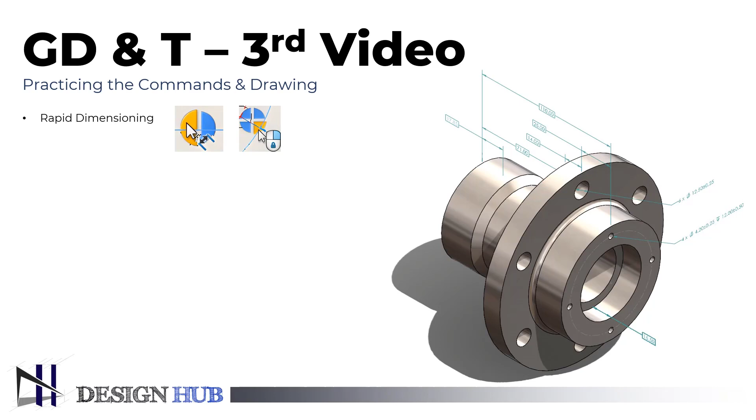In this video, we will practice the commands and drawing with tips and tricks. We will learn about rapid dimensioning, how useful is the dimension palette, and the format painter.

First, let's create a new part and select the required plane for sketching. Here, I will select the front plane. Now, make a center line to activate the revolve command.

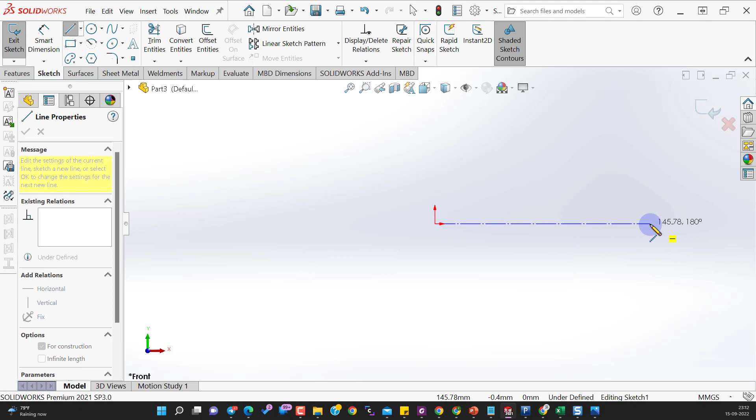Now, follow the directions, and start sketching the required shape of the part above the center line.

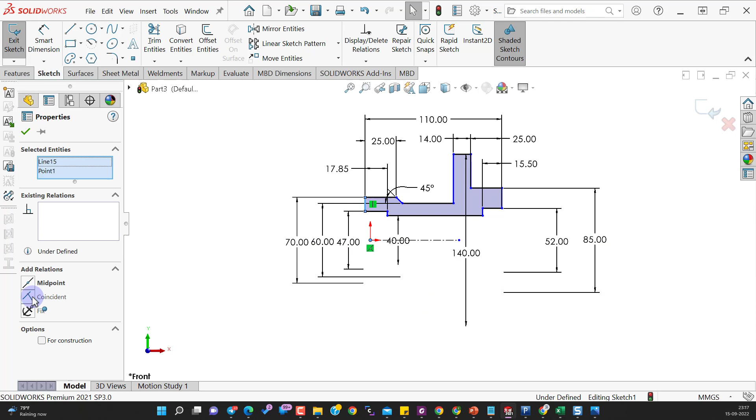After making the sketch constrained, use revolve command and select the center line as an axis of revolution.

Now, we will specify the material of the part. The material used here is AISI 316 stainless steel. This stainless steel can bear harsh environmental conditions requiring greater resistance to corrosion, higher operating temperatures with increased tensile strength,

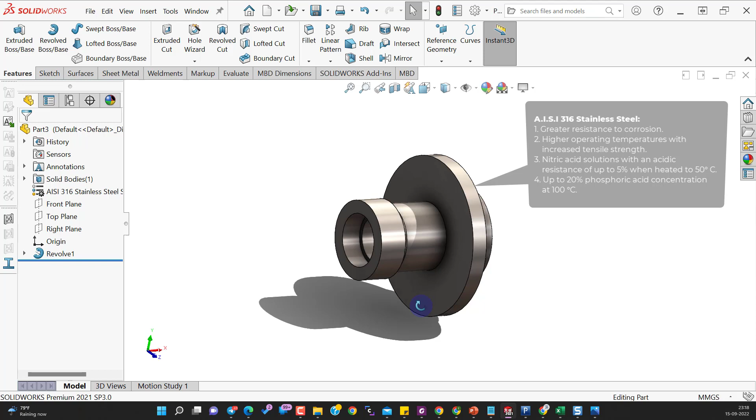nitric acid solutions with an acidic resistance of up to 5% when heated to 50 degrees Celsius, up to 20% phosphoric acid concentration at 100 degrees Celsius. This material has a relatively high strength to weight ratio, is easy to clean, and has an aesthetic appearance.

Now, we will introduce the fillet to the part with a radius of 3 mm.

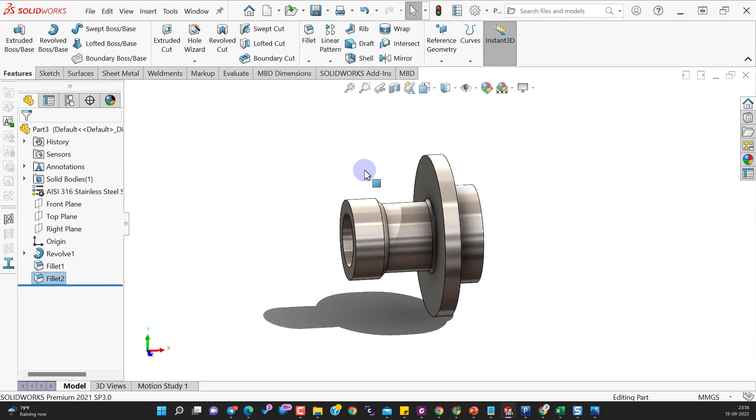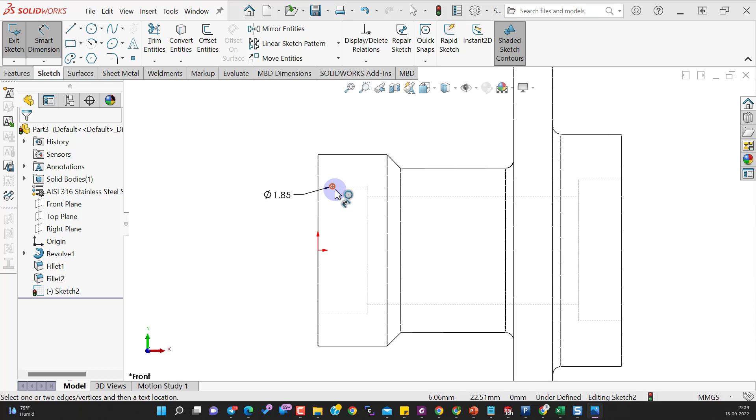We will make a half round groove along the inner side of the part. Create a circle with a diameter of 1.85 mm, and place it 2 mm from the part's left side.

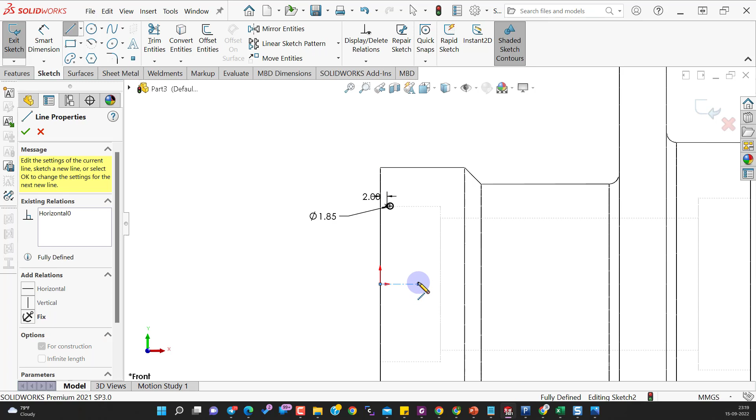Make a center line and use revolve command. You can check the half-round groove by using the section view.

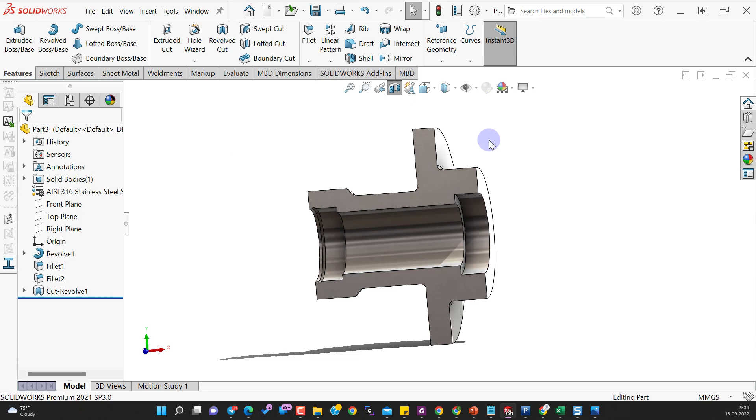Now, in order to make 4 M5 holes on the right hand of the part, place a point on this surface.

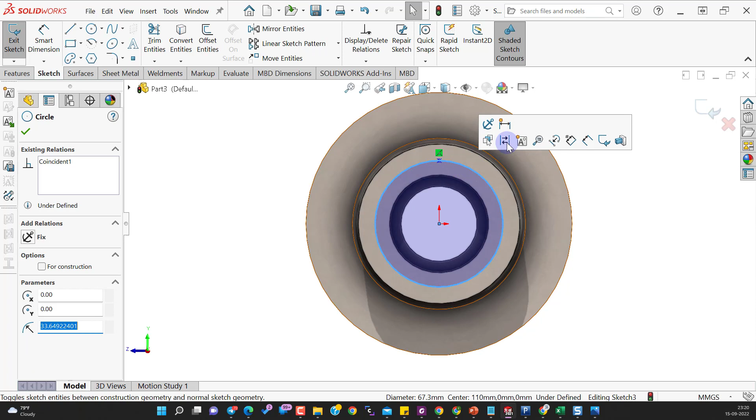Make the circle a construction geometry, and define its diameter as 70.50 mm.

Align the point and center of the part vertically to make the sketch constrained.

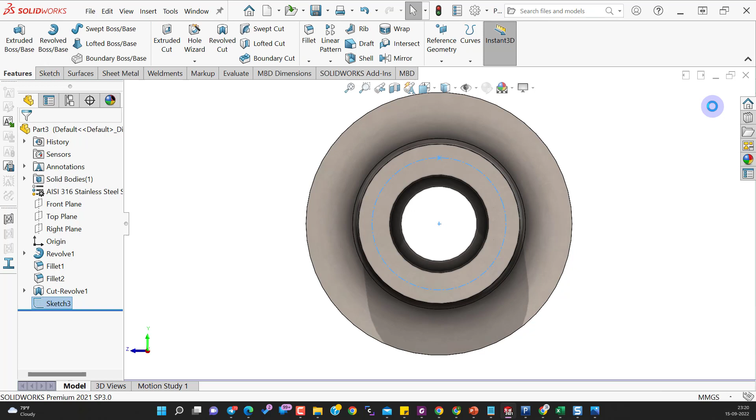Now, we will use the hole wizard command. We will keep the standard of the hole, which is ISO. Also, select the hole type, which is tap drills, and the size is M5.

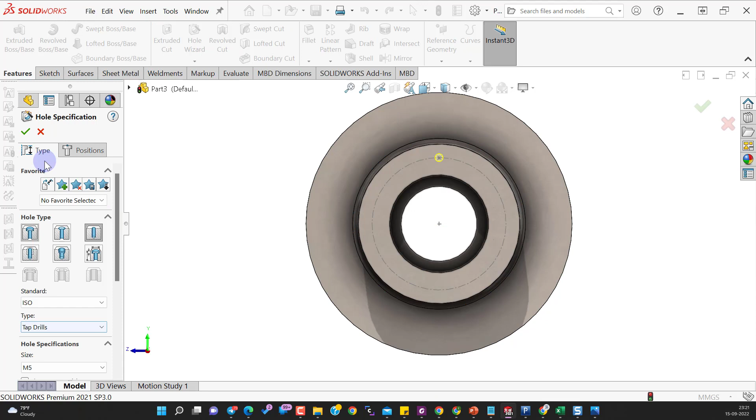Now, go to the Position tab, and use a 3D sketch to place the hole. We will introduce the depth of the hole to the shoulder, which is 12 mm.

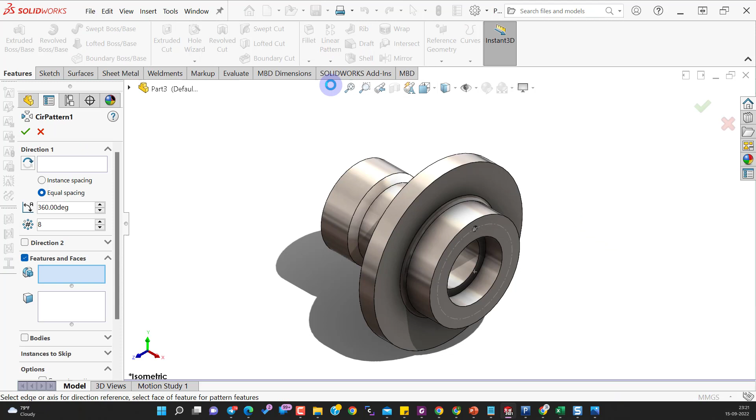Now, we'll use the circular pattern command to pattern this M5 tap drill. First, we need to select the direction of the pattern. For that, we will select the inner surface of the part. And the total number of holes we need is 4.

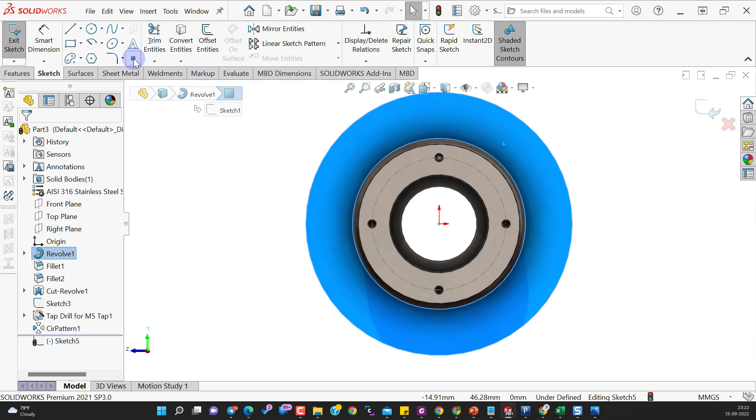Now, we will make another hole on the upper surface. Follow the same procedure as before for this hole until making the circle of diameter 114.18 mm.

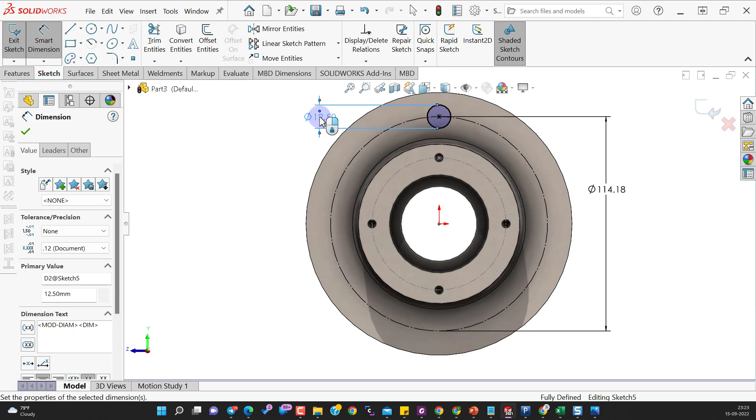We will make a circle of 12.50 mm diameter on a point, and use extrude cut command.

Now, patterning this hole. Select the direction of the hole, and the total number of holes is 6.

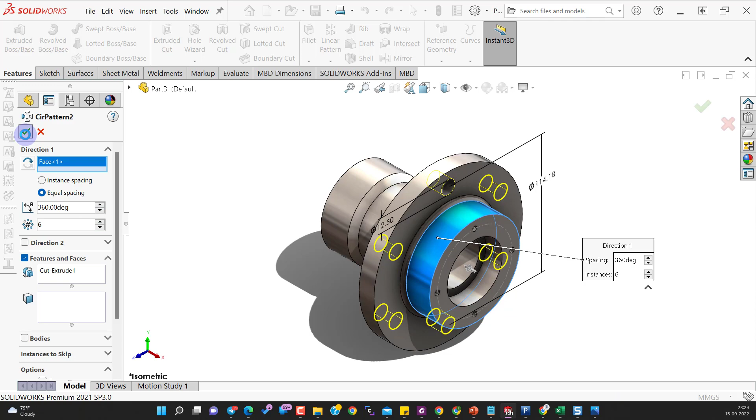Now, save this part and name it according to the requirement.

Now we will make a drawing from the part, and use A3 ANSI landscape sheet. Place the right-hand view.

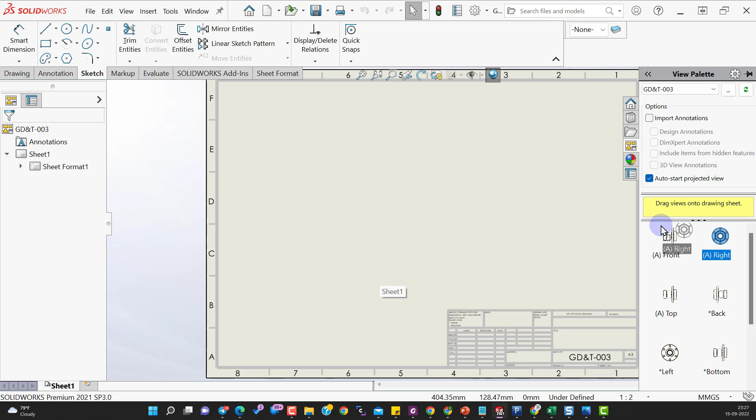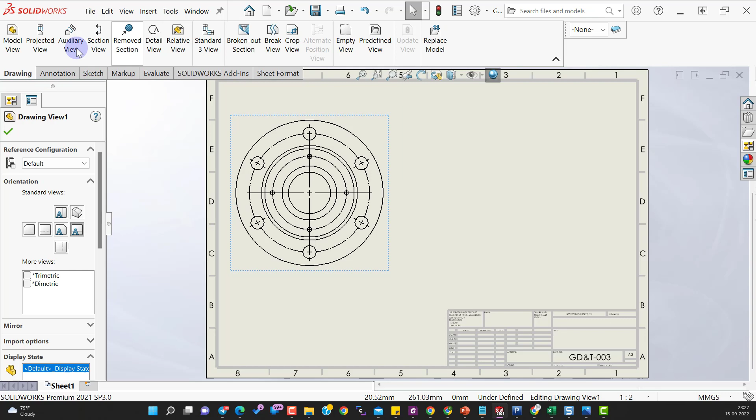Make the scaling of the drawing if required, and use the section view feature from the Drawing tab. Make the section in the center of the right-hand view.

Flip the direction of the section view if required, and drag them into the required position. Now, create layers for annotation and references.

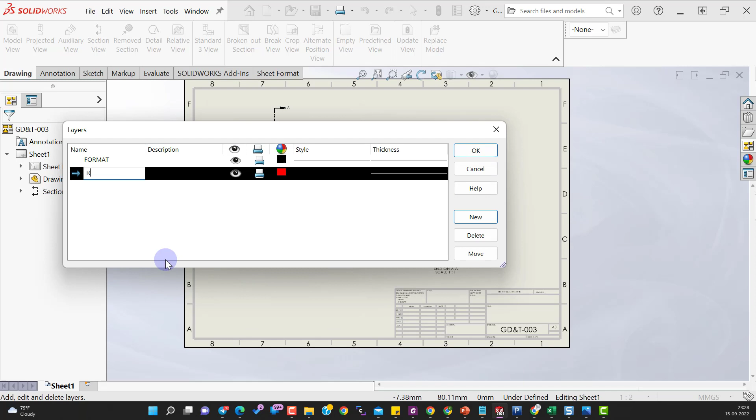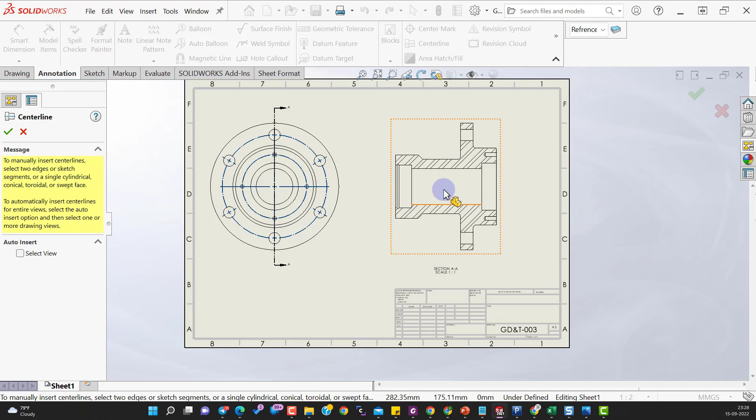We will introduce the center line in the section view. In order to give the center line only to the specific hole, hold Ctrl on the keyboard, and select the required edges.

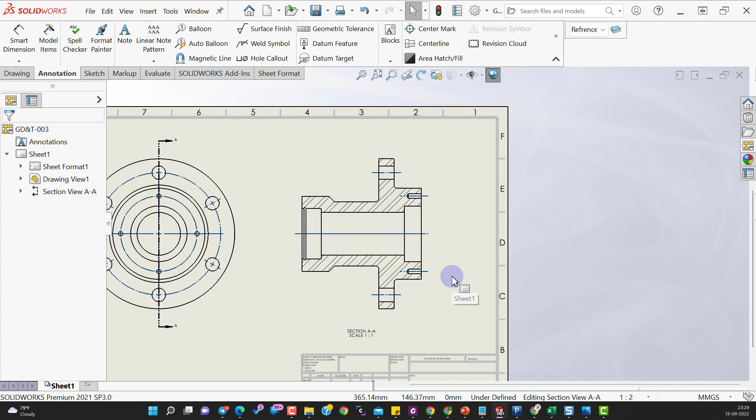The dimensions will now be added to the drawing. The component is 110 mm long.

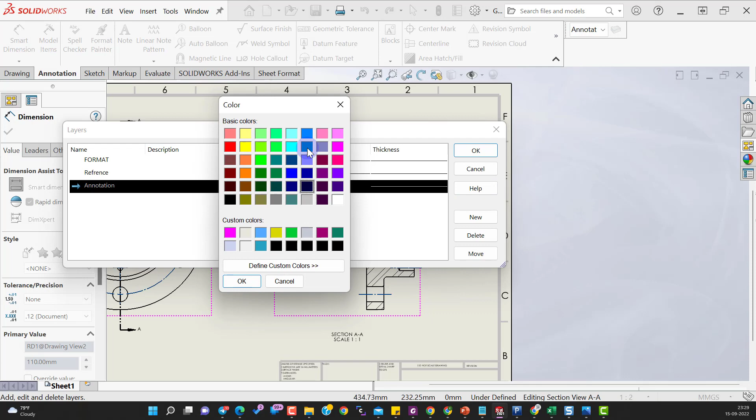We're going to introduce a 45-degree chamfer angle.

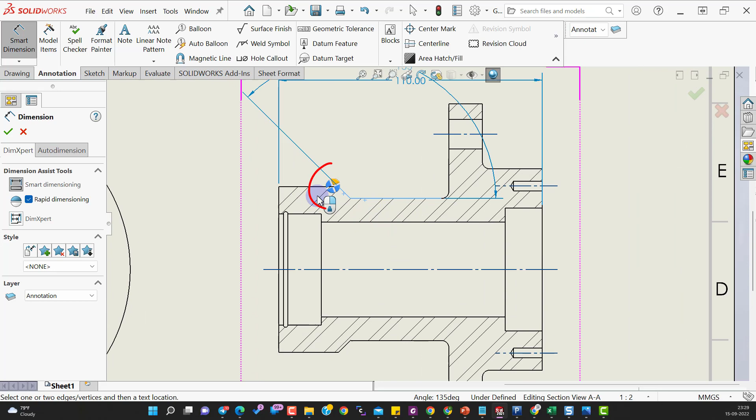This rapid dimension tool can help you nest your dimensions correctly. To neatly fit that in there, it will push those dimensions out of the way. With the aid of this tool, those dimensions can be put into a corner where they kind of make sense.

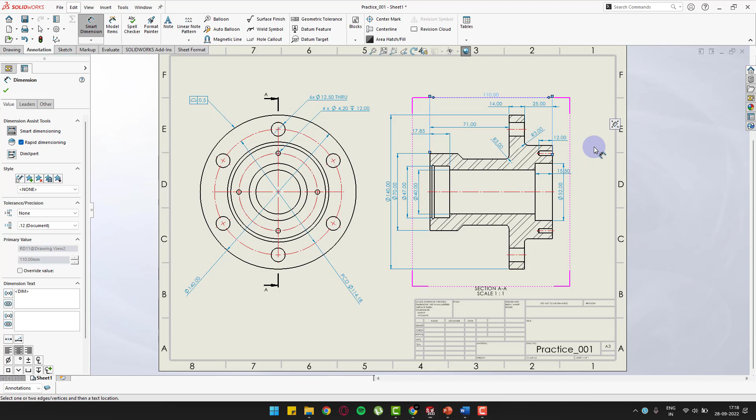Now, we will see what is the Dimension Palette tool. If you select these dimensions, you will see one pop up, simply hover over it, and you will get the Dimension Palette tool.

You can drag it off to the side, and simply click on the Auto Arrange Dimensions. It will arrange those dimensions nicely with equal spacing. You can also define the spacing between them either by using this wheel, or by putting the needed value.

Also, you can change the properties of a particular dimension. Let's say you want to give tolerances, you can do it using this Dimension Palette tool. You can give basic, or bilateral tolerance to that particular dimension.

At this point, to avoid having to repeat this process for every matching dimension, a format painter is useful. When you click on the next dimension, the format will automatically be applied if you simply hit the Format Painter

button, and select a source property. Simply click on the dimensions that you want to format. Select all of these dimensions, then use the Dimension Palette tool to automatically arrange them. Now, just follow the rest of the video, and give the drawing required dimensions according to the industrial standards.